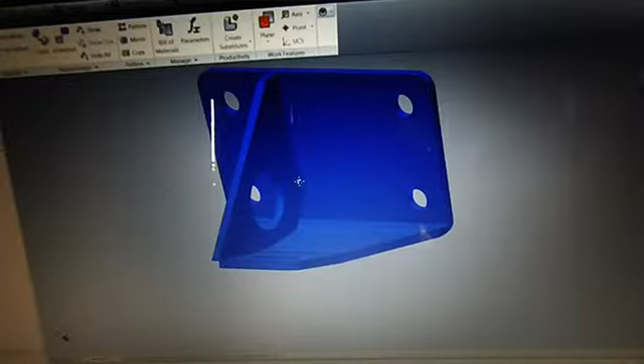So I've had somebody hitting me up to do a Barra engine conversion to the Stagea. The Stagea is currently 4-wheel drive, and they're going to want to convert it to 2-wheel drive, and then put a Barra in as well, and a 6-speed. So that's been quite interesting.

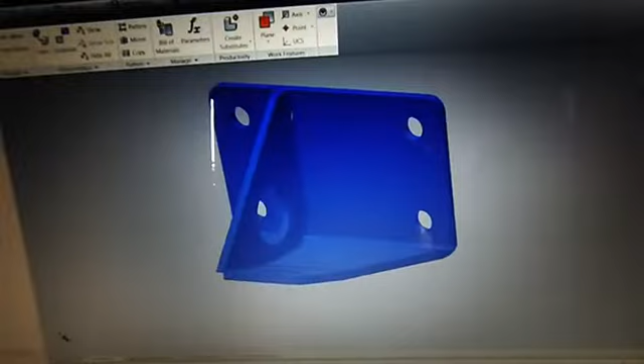Anyway, this is my R33 type engine conversion bracket, the driver's side. So in a Stagea, the passenger side mount is in the same position, but the driver's side mounts 75mm further forward. So we're going to draw one very similar to this, but with this slot 75mm further forward. Luckily, already done it. So this is what it'll look like. So the shape of it's very different, but everything's the same.

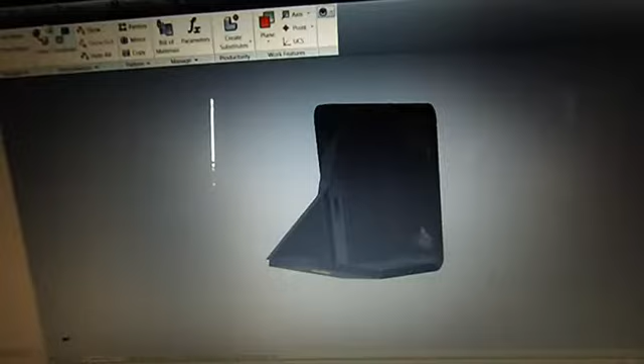The gusset is a bit fun because having the mount position for the engine mount being a lot further forward, you get this odd shape, and so the gusset has had to be folded as well instead of just being a flat plate. I'll show you both of them together.

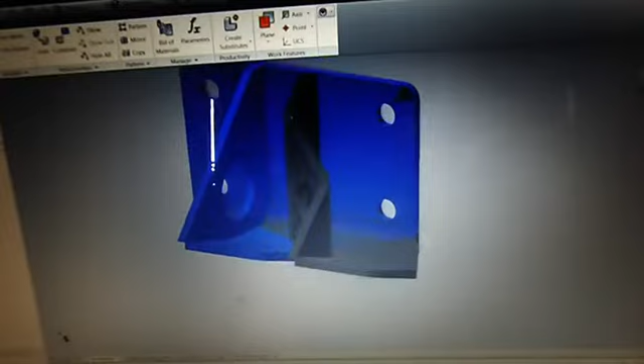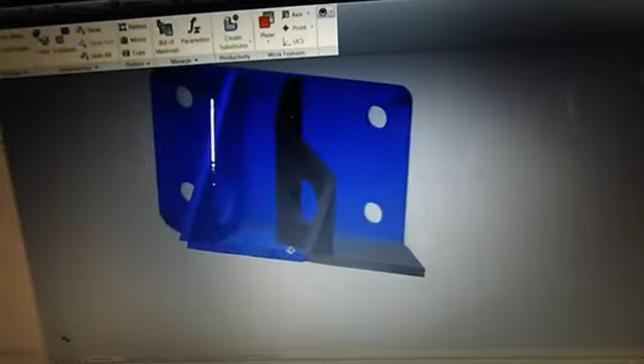So the blue one's the R33 type, and the grey one's the Stagea type. So it's 75mm further forward for the slots. Other than that, it's pretty much the same. So the holes are in the same position, they're on the same planes, on the same angles. Won't know for sure if it's correct, but we'll get it cut and I'll film the setup and show you how to make one. Got laser cutting back today.

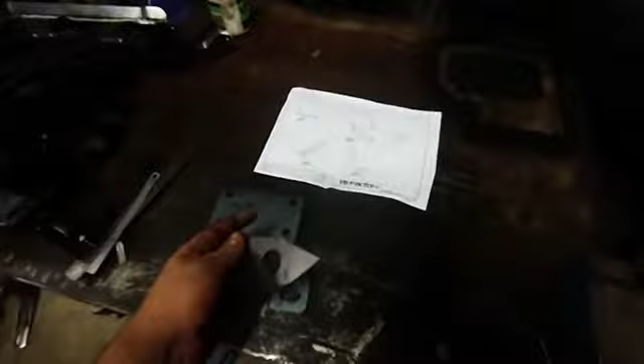So these are the two plates. That's the bracket that'll be folded, and this is the gusset. That'll, once it gets folded, it'll sit in here. Now I guess we just got to mark it out, fold it up. This is my little folding setup. So it's just a 20-ton shop press, and then one of these Metal Master press brakes. So it's pretty simple.

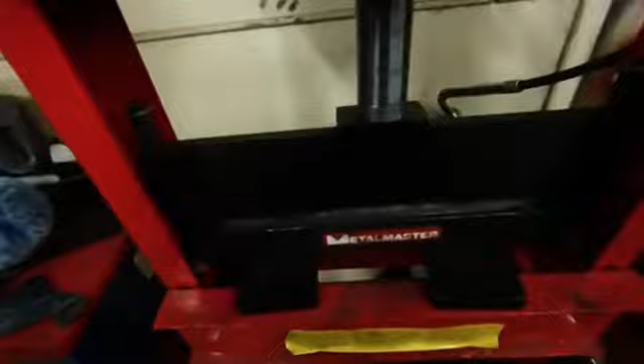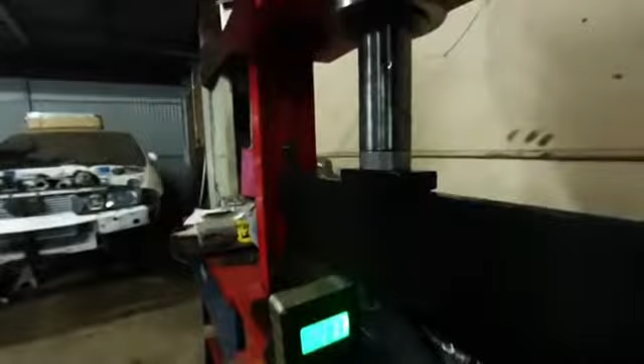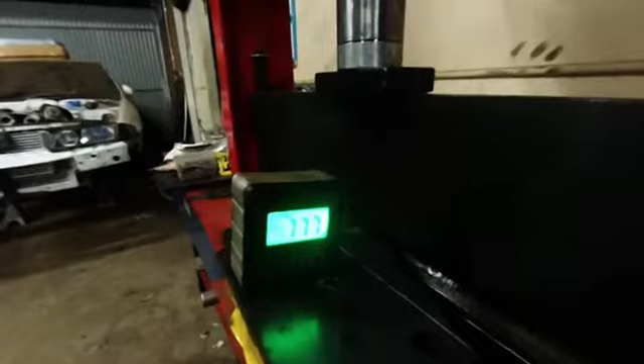We're just gonna bang her in here on the line, and you try and keep it in the center because it doesn't like to distribute the load very well. And then how we're going to tell the angle, so we're only going to bend it 15 degrees, digital level, and because it's 15 degrees we're just going to go half, so we're just going to jack it till it's about 7.5. Usually go half a degree over for it to bounce back, so yeah, to untension.

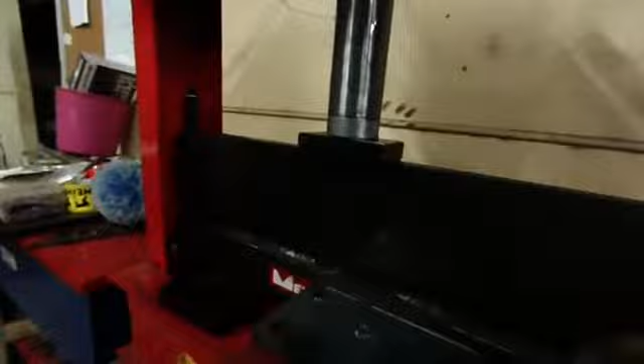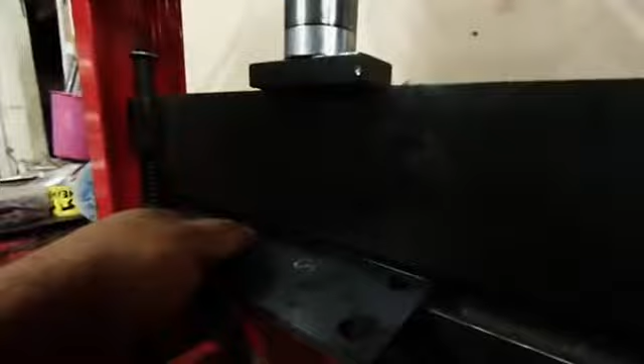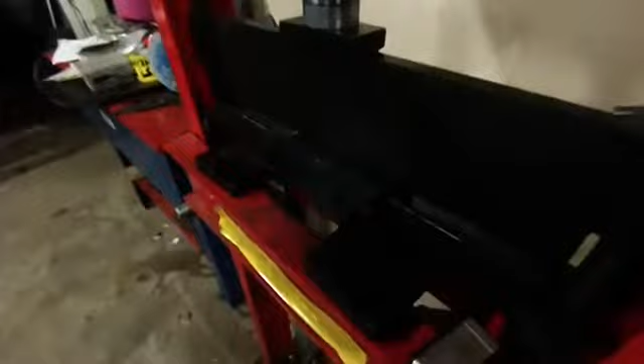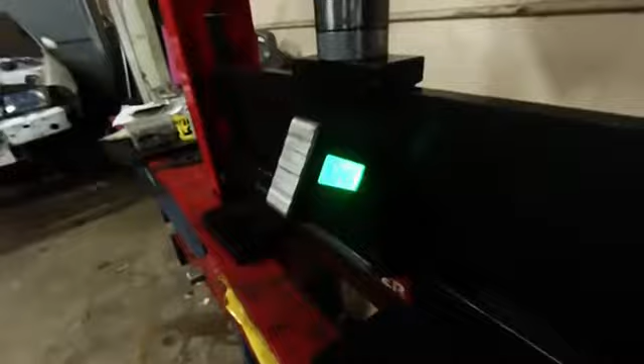We'll do the other one. So line it up, and then try to keep it straight on the line. Here we go. That should be pretty close to 90, half of that's 45, so I'm not going to press much more, so that's what we're going to look at.

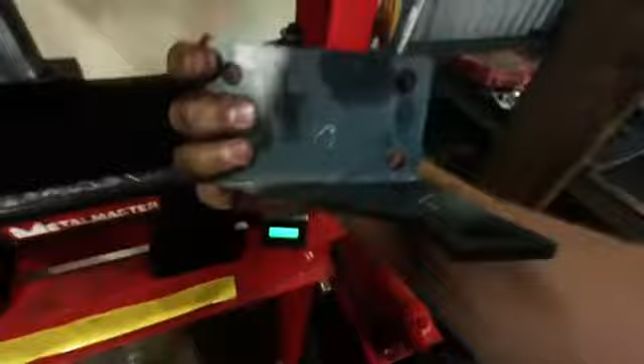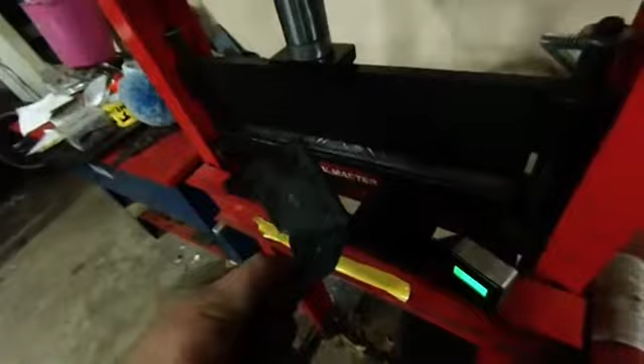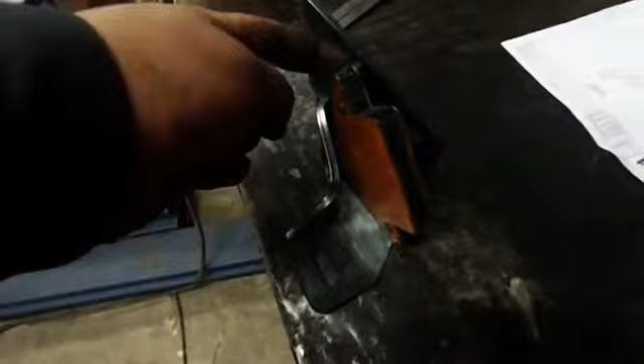So that's definitely folded the right way, and should do the job. Now we'll just fold the gusset up, and then we can weld it together. Now that we've got it all folded up, you sort of see how it goes together. 90 degrees and 45, and then the gusset folds up outside corner on the bottom, and then fillet welds everywhere else. So doesn't look too bad. I'll just get the MIG and zap together.

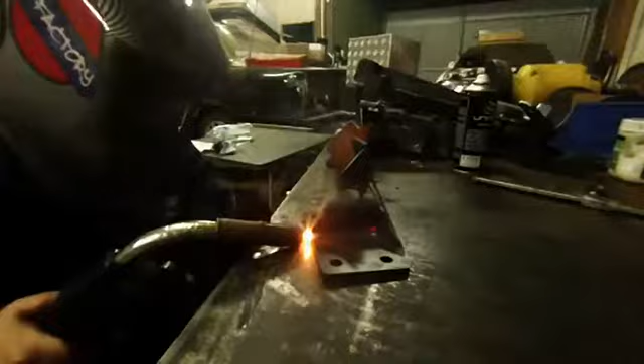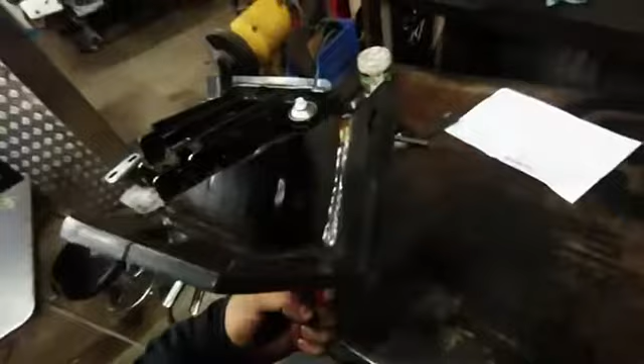So there you have it, one Barra to Stagea driver's side engine conversion bracket. Passenger side can use the normal Barra RB25 conversion bracket I got. Give it a quick flap, knock a bit of spatter off it, just good to go.